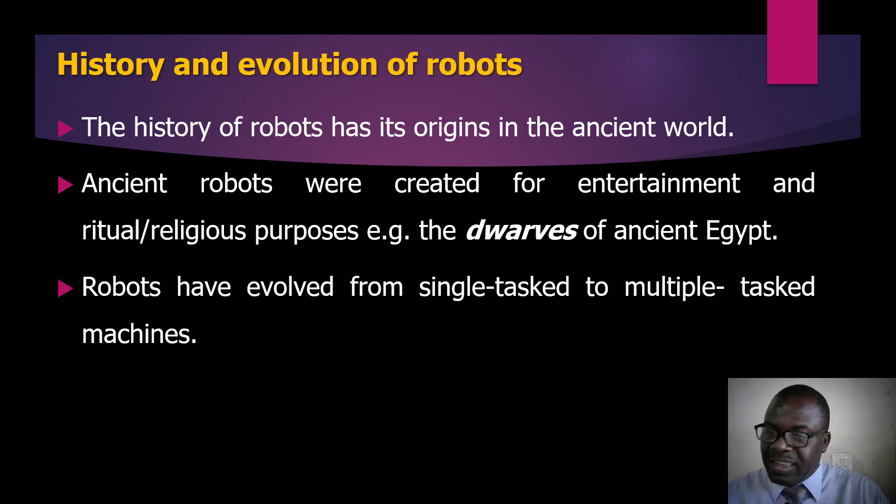History of robots has its origins in the ancient world. Ancient robots were created simply for entertainment and also for ritual or religious purposes, e.g. the dwarves of ancient Egypt. Robots have evolved from single-tasked to multiple-tasked machines.

The mechanical digesting duck robot was created in 1738 by a Frenchman named Jacques de Vaucanson. The duck was a robot in the sense that it could walk, quack, swim, flap its wings, eat, and even go to the toilet.

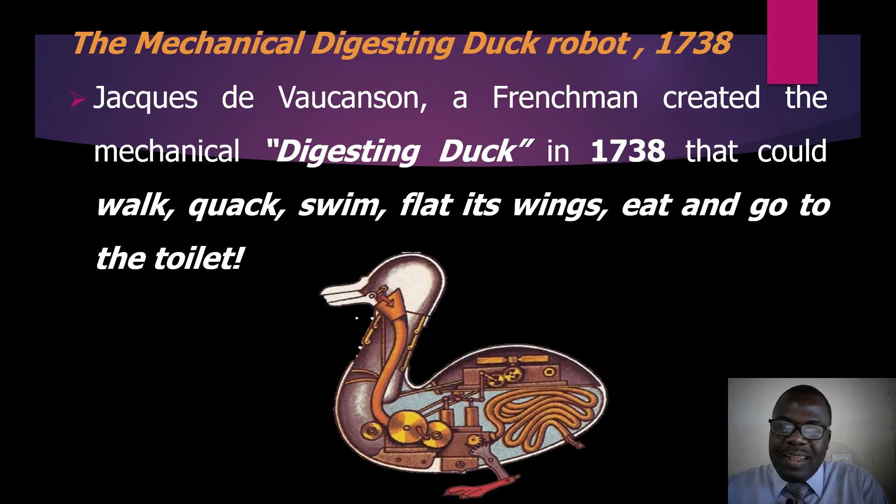Then we have the trumpeter. The trumpeter was a soldier which was created by Kaufmann in 1810. The soldier could play the trumpet very well.

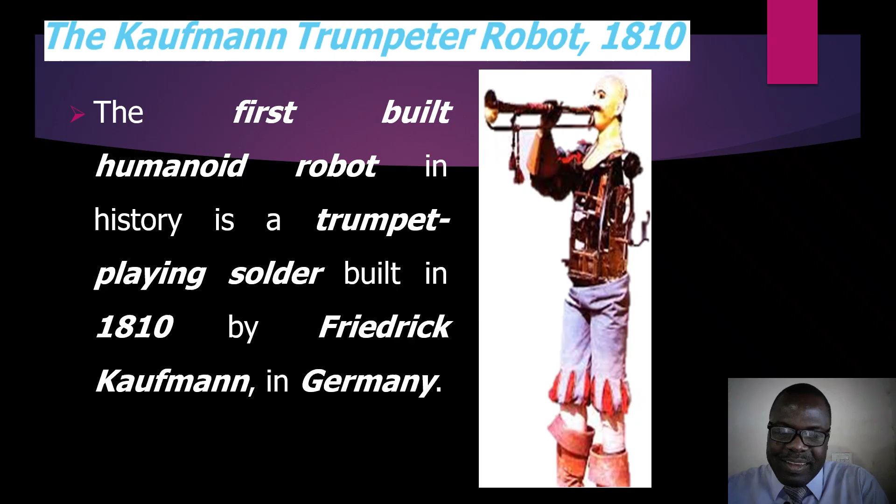Then we have the first humanoid, which was 2 meters in height, and its name was Elektro the Moto-man. Elektro the Moto-man was created by Joseph Barnett. This humanoid robot could...

Walk by voice command, speak from pre-recorded records, smoke cigarettes, blow up balloons, and distinguish between red and green using his photoelectric eyes. His head could be moved, his arms could move, and he could also count from 1 to 10 using his fingers.

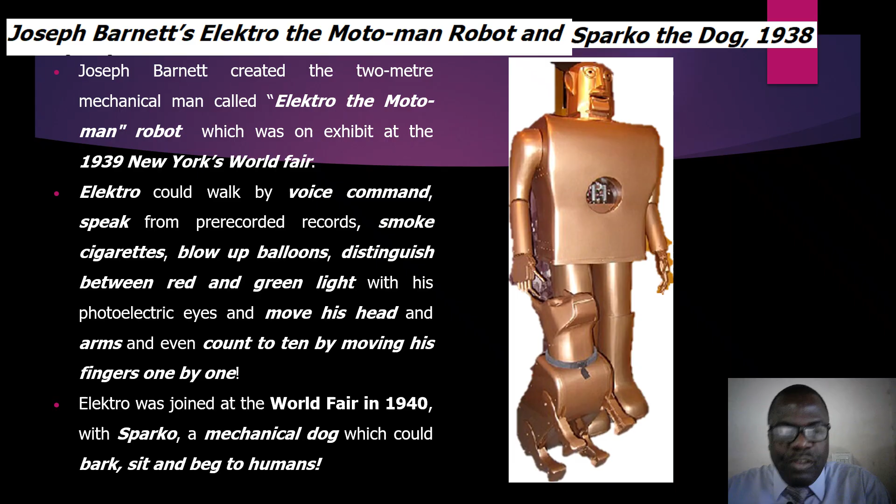Elektro the Moto-man was joined in 1940 by Sparko, a mechanical dog which could sit and beg to humans for food, etc.

We also have the first industrial robot, which was created by George Devol in 1954, and its name was Unimate. Unimate was a robotic arm which could perform repetitive tasks in the automotive industry, like painting, welding, etc.

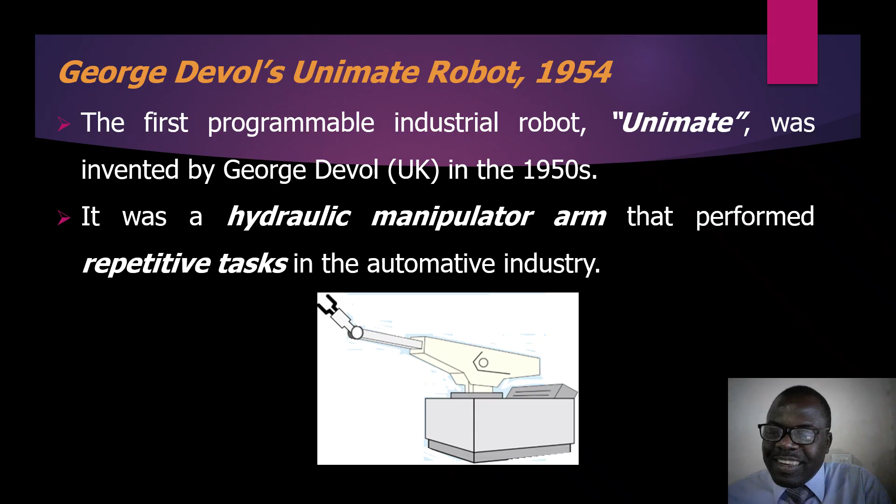We also have Wabot 1 and Wabot 2, but we are going to consider Wabot 1, which was created in 1973. This was the first full-scale humanoid robot, very intelligent.

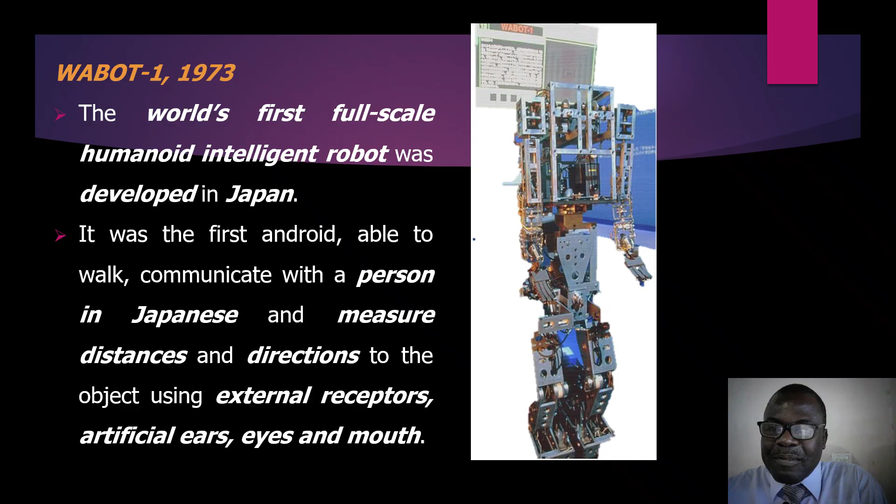Then the Viking probes were launched in 1975 and arrived on Mars in 1976, and were able to send colorful pictures to Earth.

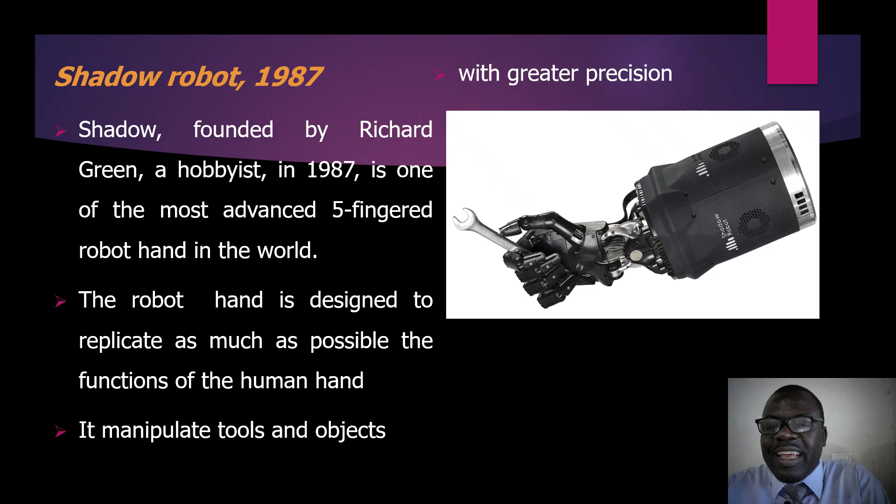Then we have a hobbyist named Richard Greenhill, who was able to produce a human hand which was black in color and named it Shadow, the robot. It was five-fingered, and the robot was designed to replicate as far as possible the functions of the human hand. It manipulated tools and objects with greater precision, just as the human hand is able to do.

Then we have Asimo, produced by Honda, Japan. Asimo was created and exposed in 2000. Unfortunately, he was abandoned in the year 2015.

The humanoid recognized the handshake, and it also waved at persons, and responded very well to human actions.

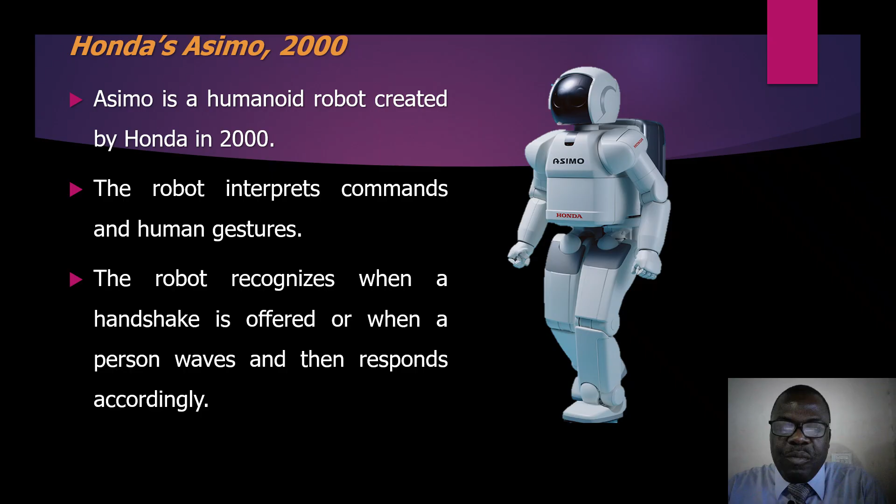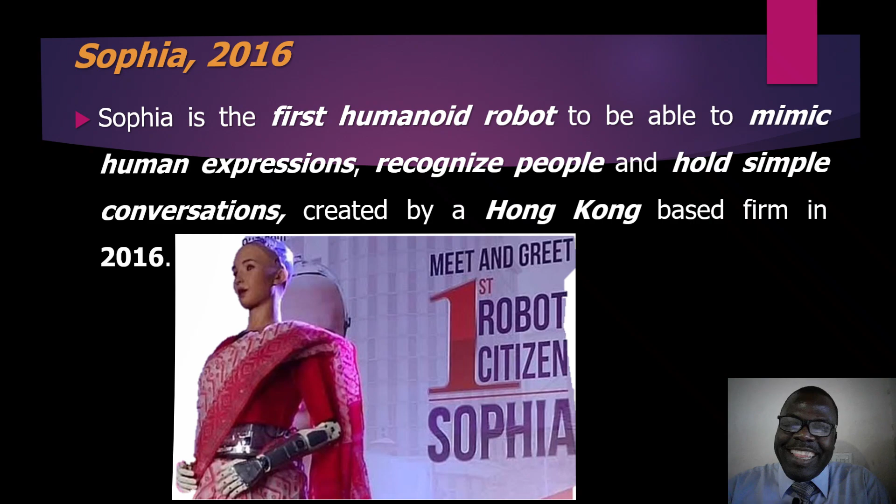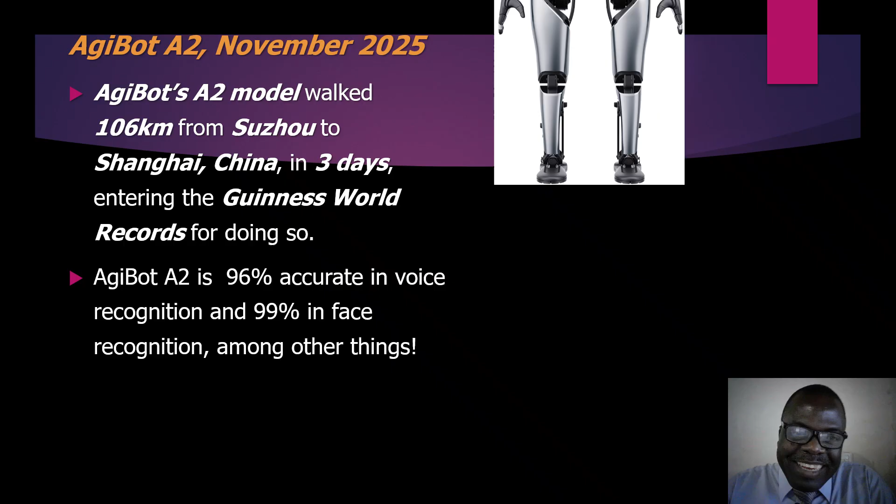Then finally, we have AgiBot A2. This AgiBot A2 model walked from Suzhou to Shanghai, taking 3 days, and was able to enter the Guinness World Record for doing that.

AgiBot A2 is 96% accurate in voice recognition and 99% in face recognition, among other things. Agibot is the current robot holder of walking the longest distance.

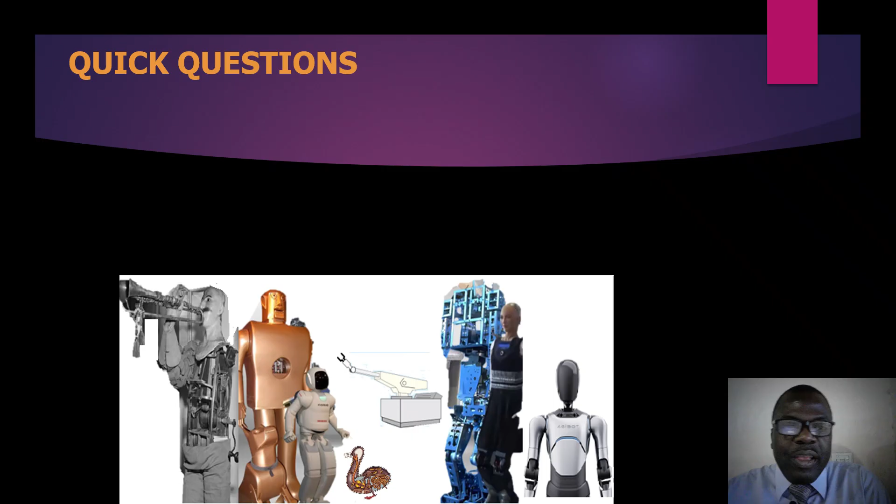Sorry, before we get to the next video, here are the quick questions. Define robotics and robots. What two reasons were ancient robots created for? And finally, can you quickly identify the robots given in the picture in the order they existed?